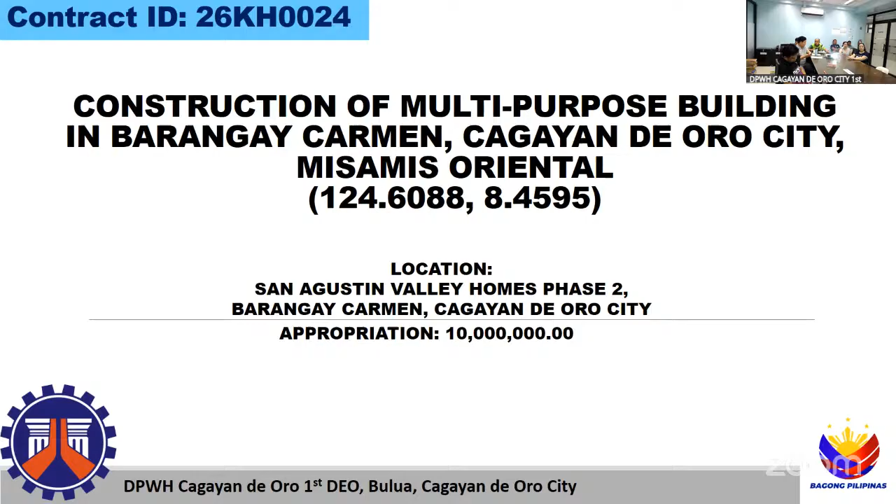Good afternoon, everyone. I'm Dina Ann Bernaldez. I'm going to present the project: construction of multi-purpose building in Barangay Carmen, Cagayan de Oro City, Misamis Oriental, with coordinates 124.6088, 8.4595, and project ID 26KH0024, located in San Agustin Valley Homes, Phase 2, Barangay Carmen. The approved budget of contract for this project is 9,899,563 pesos and 69 centavos, with a contract duration of 180 calendar days.

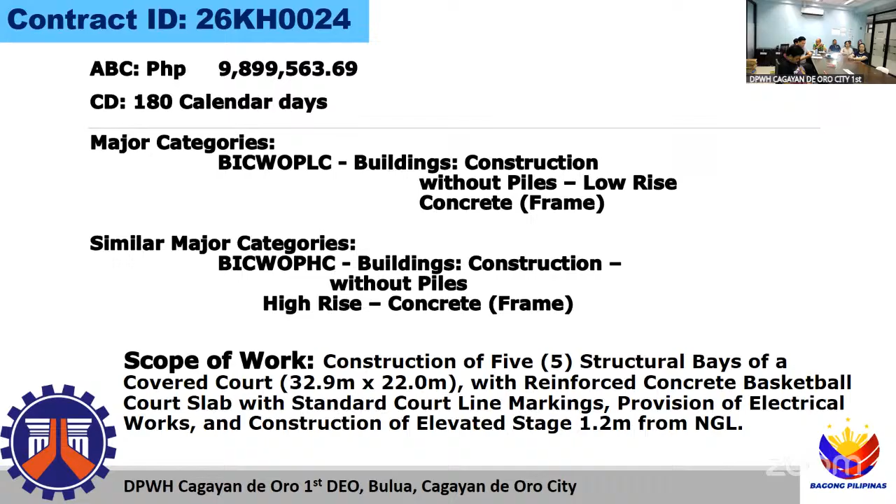The scope of work for this project includes construction of 5 structural bays of covered court with a dimension of 32.9 meters by 22 meters, reinforced concrete basketball slab with standard court line markings, provision of electrical works, and construction of an elevated stage at 1.2 meters elevation.

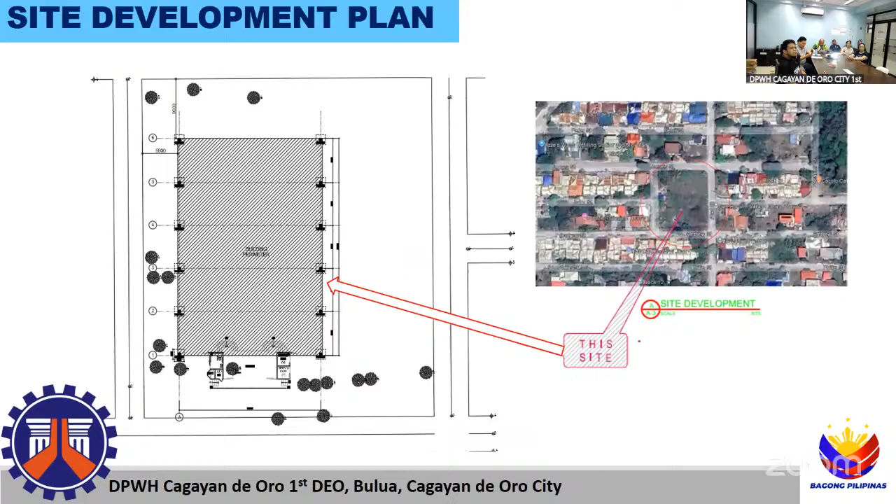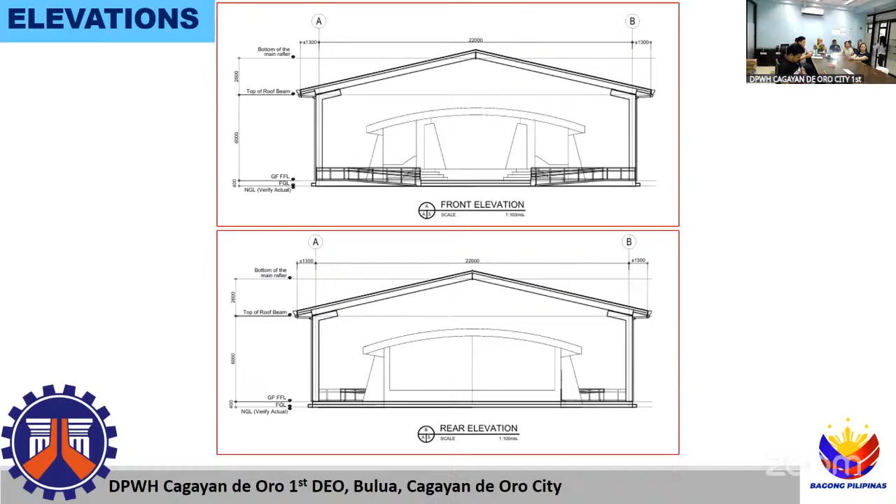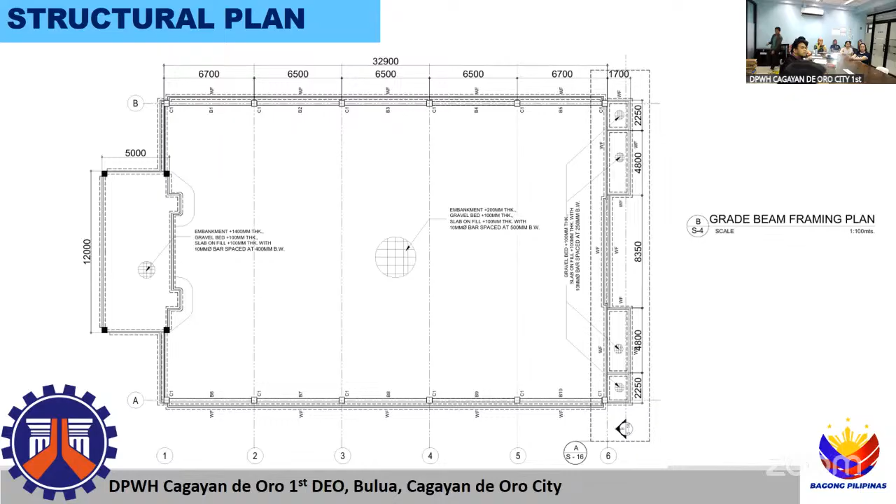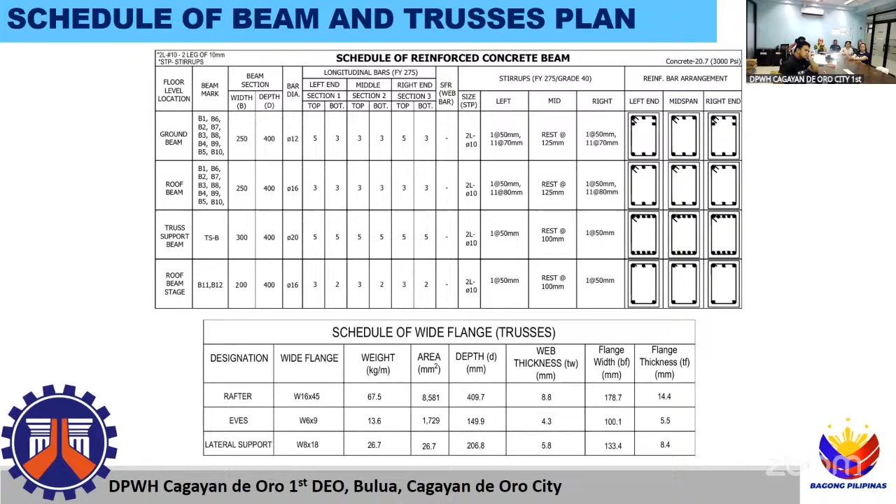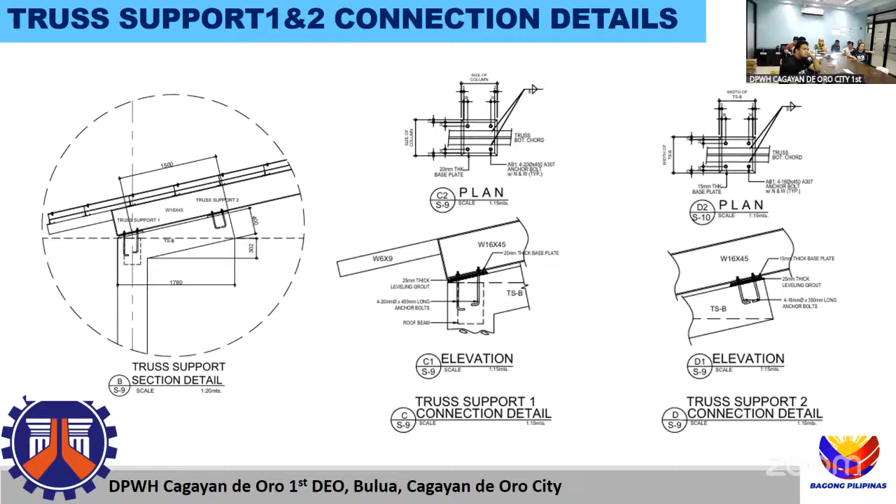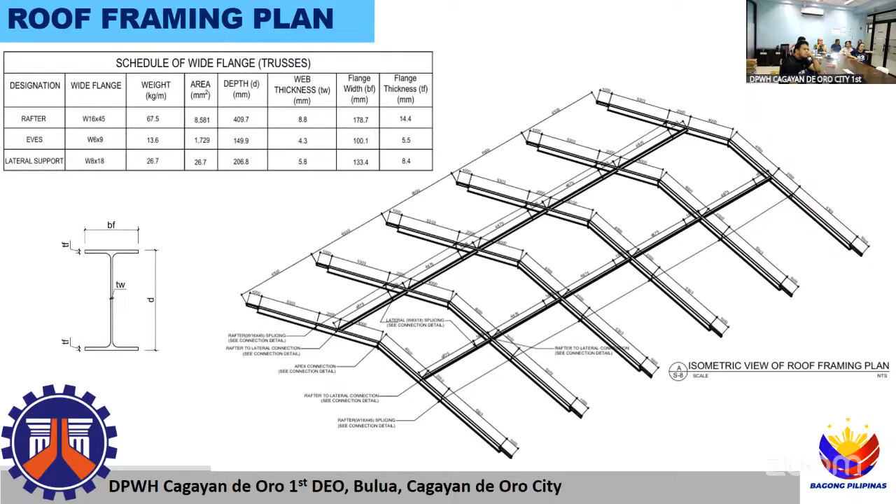Truss support details for the roof framing plan. For the rafter, we will be using the wide flange of 16 by 45. For the eaves, will be 6 by 9. And for the lateral support, which is 8 by 18.

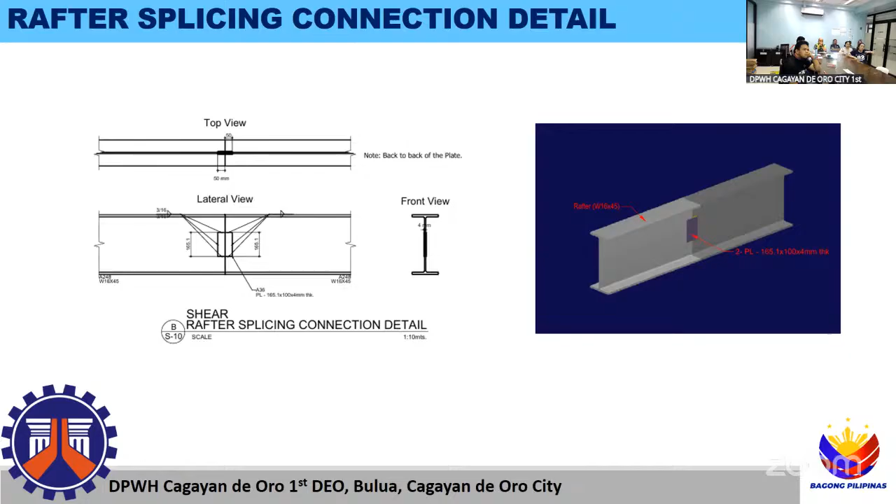Here is the apex connection detail for the rafter, as well as its rafter splicing connection and the shear splicing connection detail. And also for the connection to the lateral and the rafter.

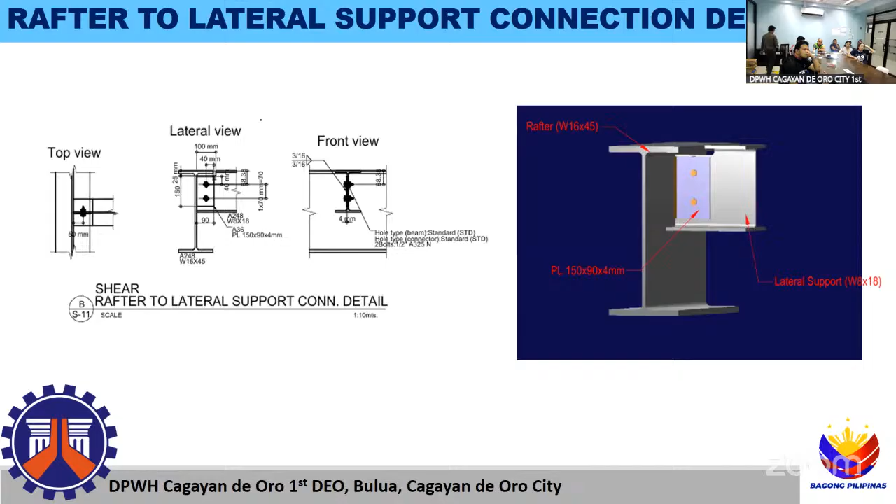Also the shear connection for the rafter and lateral support. The lateral support connection, shear lateral support connection support splicing connection detail. And for the eaves connection to the rafter.

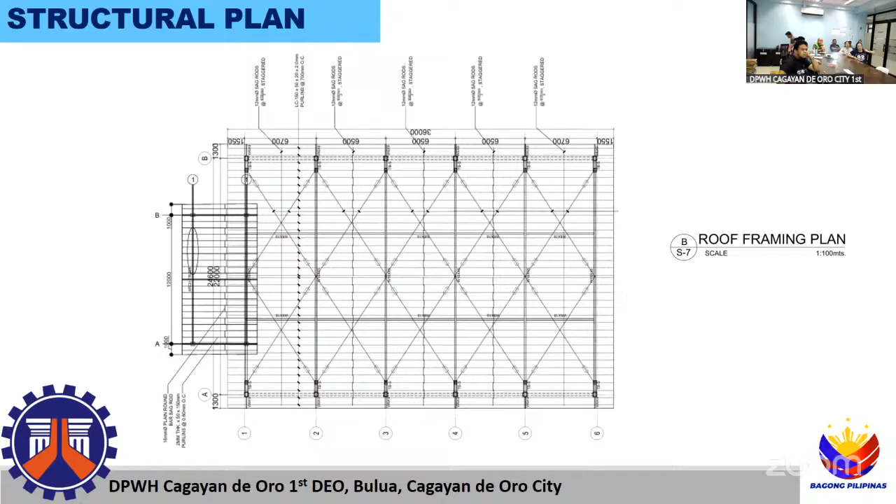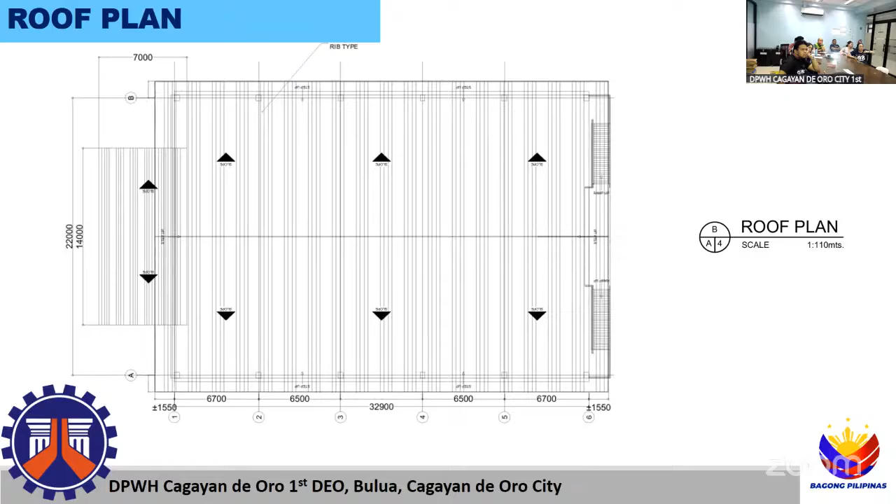So for the roof framing plan, which will include the cross bracing connections and the sagrods detail. So for the roof plan, which will be used of pre-painted rib type for both the stage and the covered court. This project also includes the provision of the ramp for PWDs and the plumbing details. For the summary of quantities.

For the footing, column and beams, we'll be using a structural concrete class A, and for the slab will be structural concrete class B. So here are the...

Also, we will be providing some safety warnings on site.

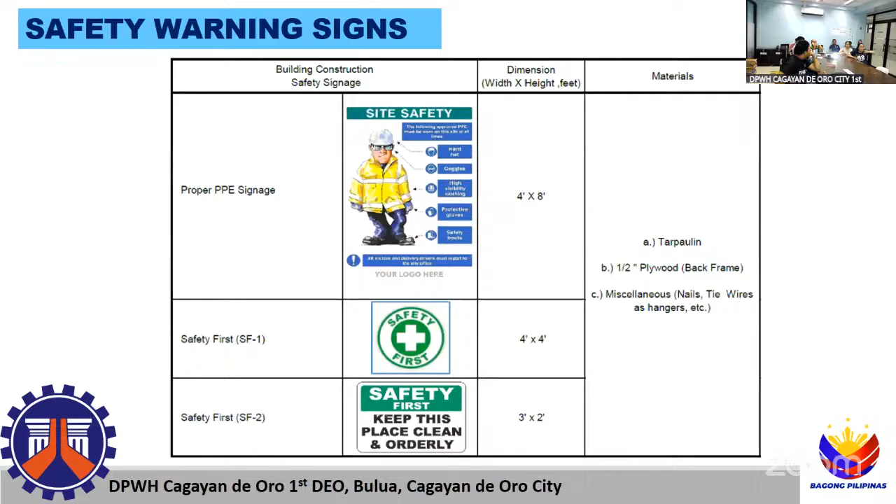For item 1001, for B31, permits and clearances, 1 lump sum. B51, project billboard signages, 2. B.71, occupational safety and health, 1 lump sum. B.91, mobilization, demobilization, 1 lump sum.

For earthworks, 803-1A, structural excavation common soil with a quantity of 255.57 cubic. Embankment from roadway excavation, item 8041A, with a quantity of 548.99 cubic. For item 8042A, embankment from borrow common soil, quantity of 293.42 cubic. For gravel fill, item 8047, quantity of 99.7 cubic.

For reinforced concrete, item 900-1C, structural concrete 3000 psi class A, 28 days, 63.16 cubic. Item 900-2C, structural concrete class B, 28 days, quantity of 83.16 cubic. For item reinforced concrete deformed bars, grade 40, item 902-1A1, 12,581.87 kilograms. For item 9032, formworks and false work, 364.92 square meter.

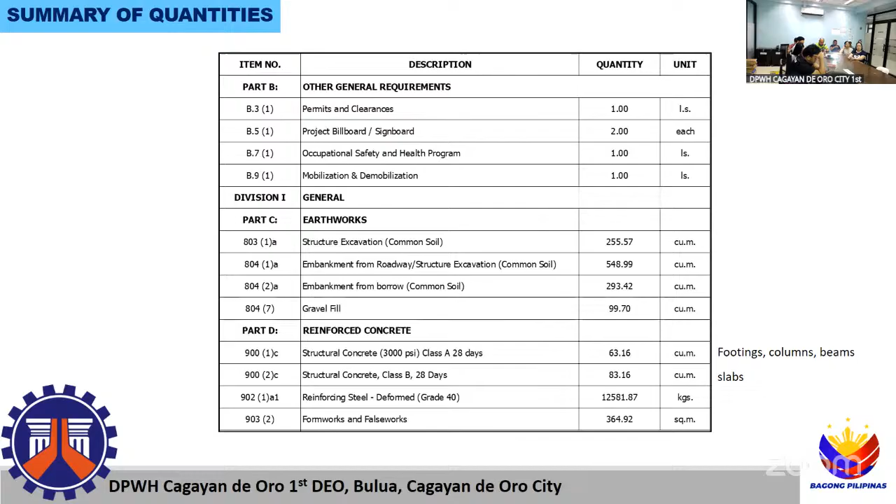For finishes and other civil works, item 1001, soil poisoning, 82 liters. 1001-9, storm drain and downspout, 1 lump sum. For item 1003-1A, 1, ceiling, metal fiber cement board, 102.60 square meter. For item 1008-1C, aluminum glass window awning type for the stage, quantity of 1.08 square meter.

For flush door, item 1010-2A, quantity 1.44 square meter. For item 1013-2A, fabricated metal roof accessories, ribs and hip rolls, 43.92 linear meter. For item 1013-2B, fabricated metal roofing accessories flashing, 202.52 linear meter. For item 1013C, fabricated metal roofing accessories for gutters, 20 linear meter.

For item 1014-1A2, pre-painted metal sheet, corrugated, with a quantity of 1,118 square meter. For item 1027-1, cement plaster finish, 334.46 square meters.

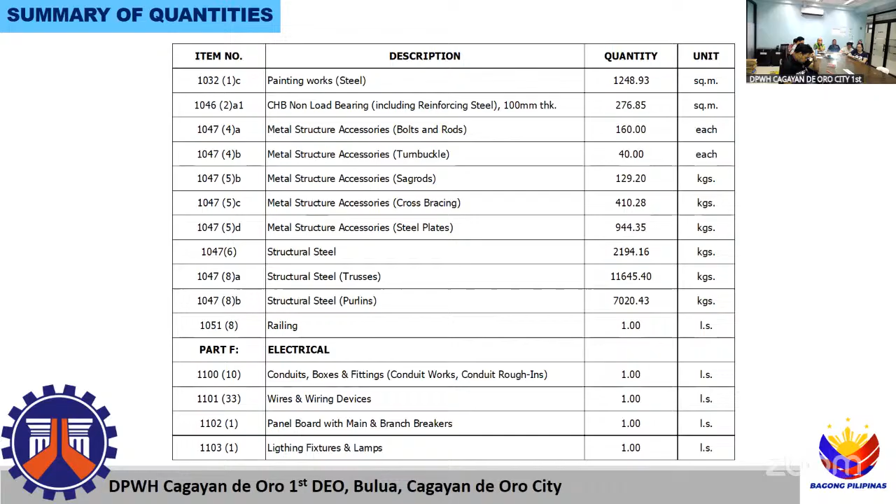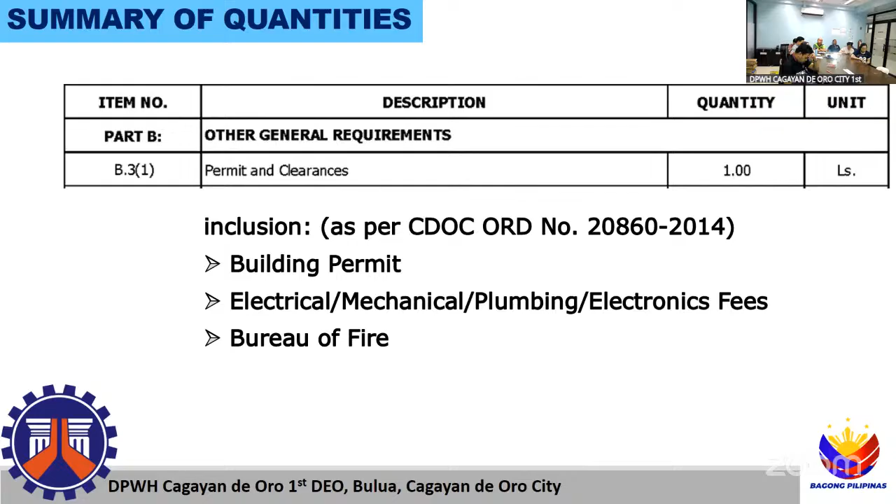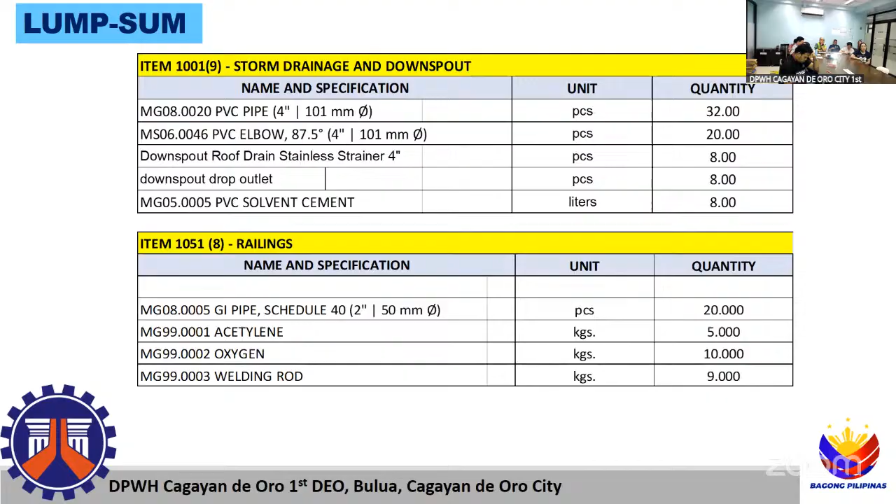For the safety warnings and signages, so the project also includes the permits and clearances. And for the lump sum, these are the items: wirings and panel boards and lighting fixtures, conduits, also storm drain and railings.

So for the minimum requirement: cargo trucks at 12, concrete vibrator, 1 ampere, 5. Backhoe, 0.80 cubic meter, dump truck, 12 cubic yard.

Again, sa cargo, 12 yard, 1 owned. Sa concrete vibrator, 5 ampere, 2 units owned. Backhoe, 0.80 cubic meter, 1 leased. Dump truck, 12 cubic yard, 1 unit owned.

So 1 bagger mixer, 4 to 6 feet cubic minute, 2 unit owned. Bar cutter, 25 mm rebar, 1 unit owned. Bar bender, 25 mm max rebar, 1 unit owned. Welding machine, 50 ampere, 1 unit owned, 500, 1 unit owned. Cutting outfit, 14 inches cut-off machine, 1 unit owned.

Material testing apparatus, 1 set owned. Minor tools, 1 set owned. Truck mounted crane, 31 to 35, 1 unit leased. So to plate compactor, 5 HP, 1 unit owned. So that's all.

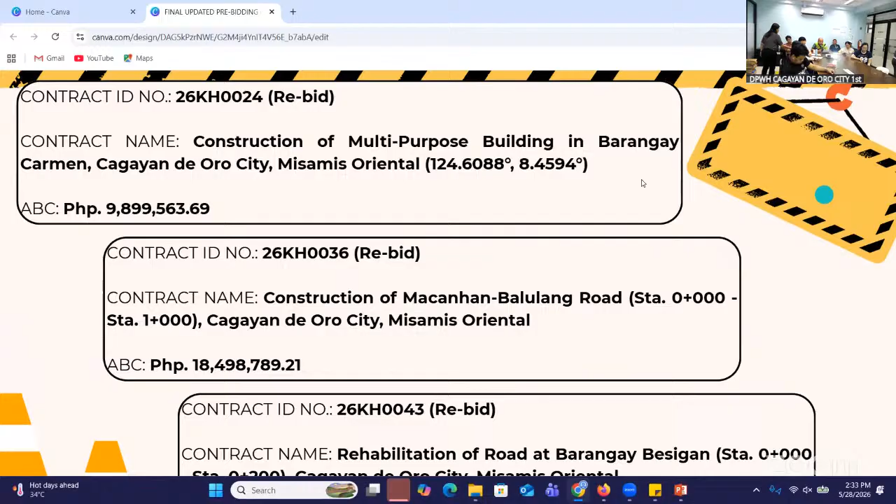Construction of Macanhan-Balulang Road, Station 0+000 to Station 1+000, Cagayan de Oro City, Misamis Oriental, with an approved budget for the contract of 18,498,789 pesos and 21 centavos. The details of this project will be discussed by Engineer Carmen.

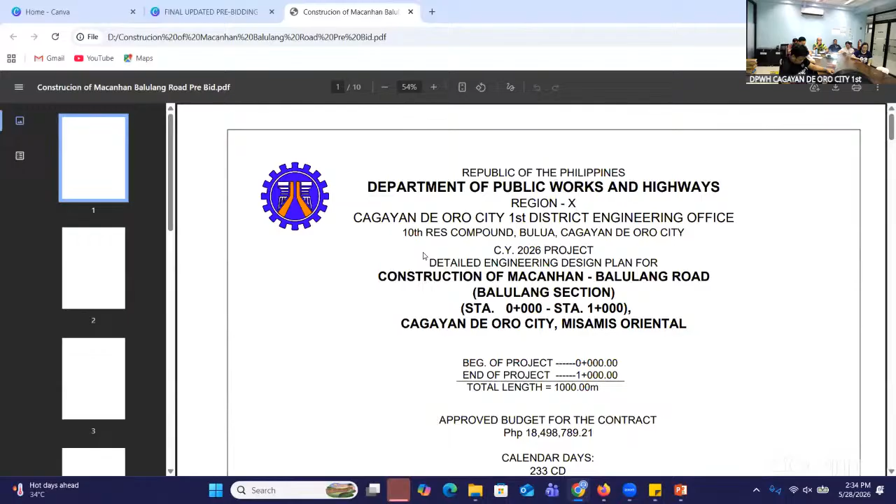Hello, good afternoon. For construction of Macanhan-Balulang Road, Balulang... shucks, my bad, let me check the title. Sorry, we need to change the title, there is no Balulang section, it shouldn't be in the title. We'll change it for the bid bulletin again.

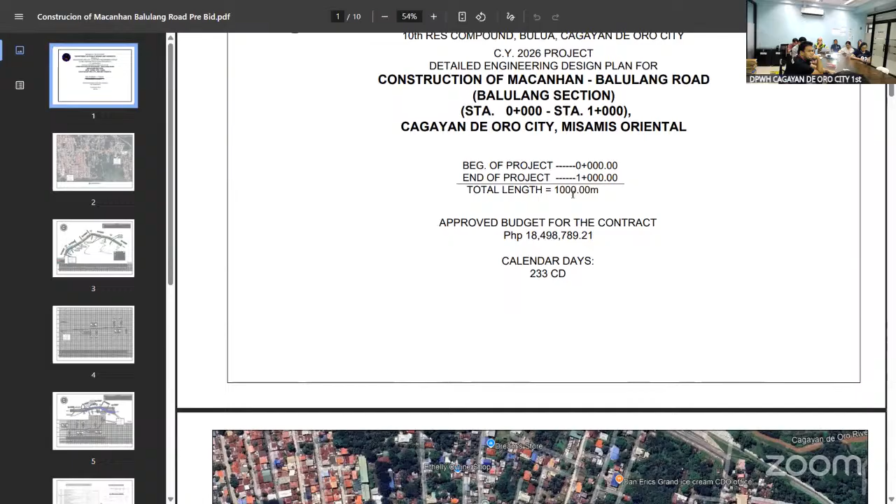Station 0 to Station 1000, Cagayan de Oro City. Beginning of project 0+000 to end of project 1+000. Total length of road is 1,000 meters. Approved budget for the contract is 18,498,789.21, with 233 calendar days. Here's the location of the project, starting from the intersection or crossing to Centro Balulang and toward Uptown, City Uptown.

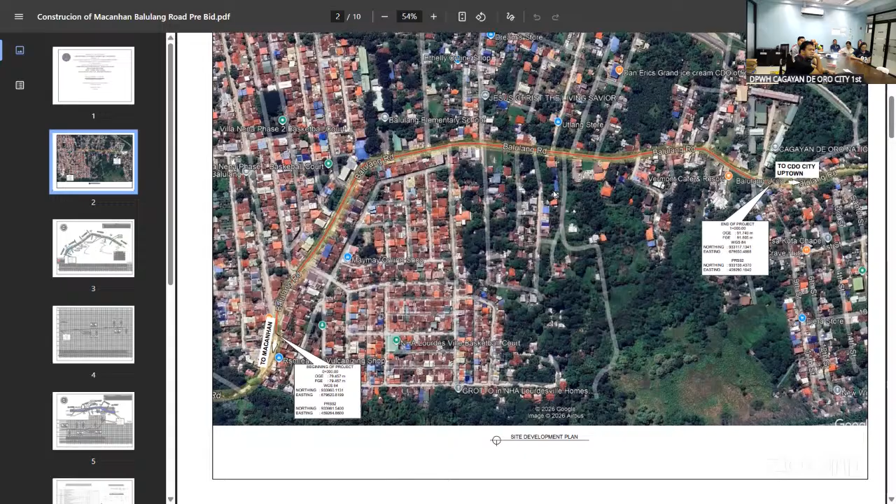So most of the scope for this project is rehabilitation of road only. Here's the plan and profile for the project. As I've stated, the stationing of the project started at the intersection, toward Centro Balulang or toward Barangay Balulang.

Okay, proceeding next, the plan and profile. And here are the summary of quantities for this project.

B.3 permits and clearances, 1 lump sum for the excavation permit. B.5 project billboards, the signboard for each. B.7.2 occupational safety and health program, 1 lump sum. B.8.2 traffic management, 1 lump sum. B.9 mobilization, 1 lump sum.

For our earthworks we have 1013B3 removal of actual structures and obstruction, 0.23 meter thick PCCP unreinforced, with a quantity of 4,213.79 square meters. For 1022, surplus common excavation with a quantity of 211.08 cubic meters. 1041A for embankment from roadway structure excavation, common soil, with a quantity of 47.13 cubic meters. And 1051B for subgrade preparation for existing pavement with a quantity of 6,100 square meters. For the aggregate base course, item 211, we have a quantity of 1,220 cubic meters.

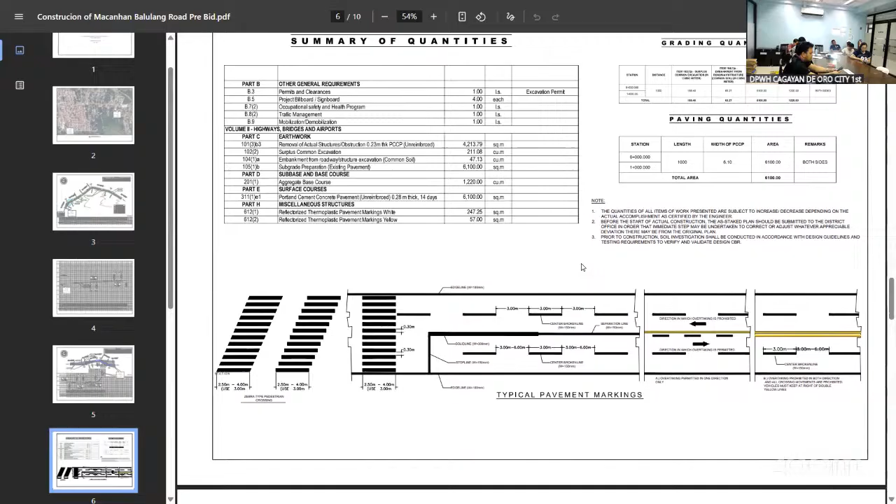Here are the typical pavement markings, details, grading quantities, and so forth. And here are the typical roadway sections for this project. We have a 280mm thickness for our PCCP.

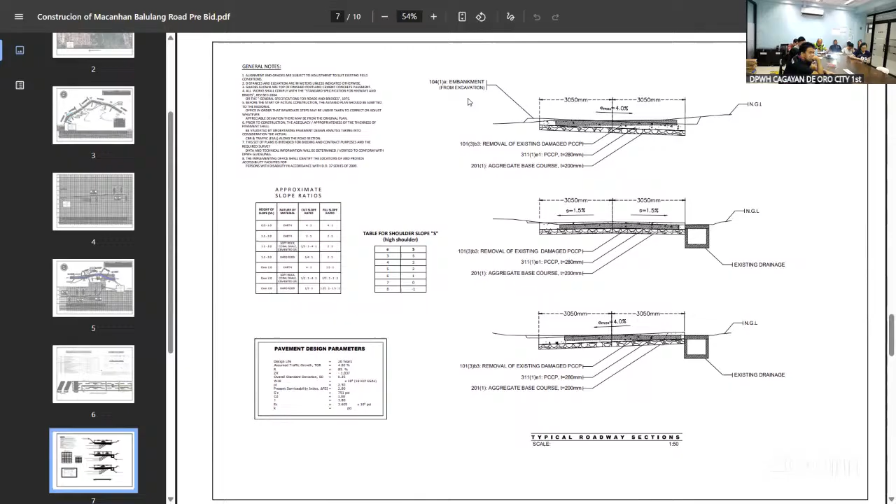That's going to be replacing our 0.23 meters thick actual or existing pavement. For the aggregate base course, we're going to be replacing it with 200mm thickness for base course. So here are the typical roadway sections, and here's the typical plan for reblocking the old pavement, with the details for that.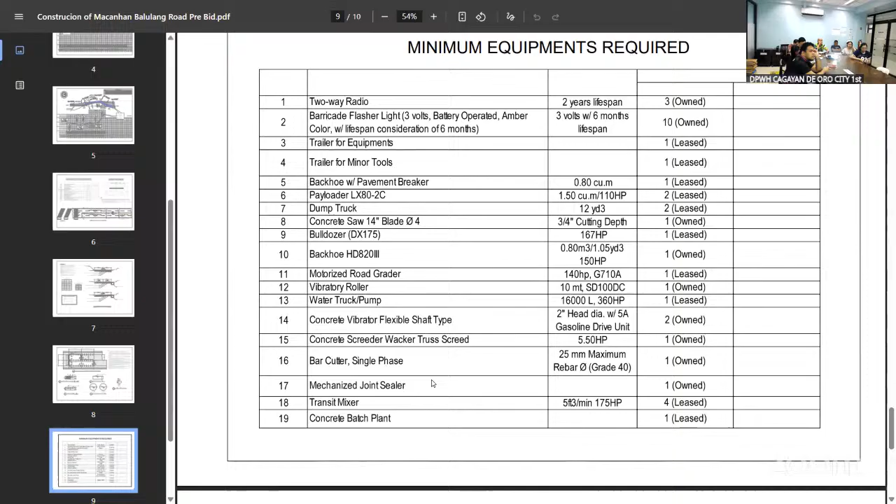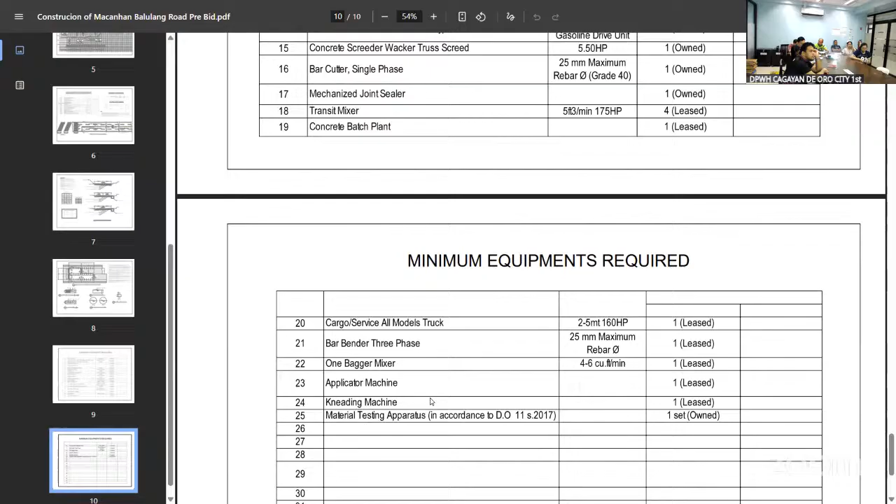Cargo/service truck, all models truck, 1 lease; bar bender, 1 lease; bagger mixer, one lease — should be one own, we'll change it for the bid bulletin, sorry. Applicator machine and kneading machine should be one own still. And lastly, material testing apparatus in accordance with DO 11 series of 2017, one set, own.

So that's all for construction of Macanhan-Balulang Road, Cagayan de Oro City, Mr. Sorrento. Any questions?

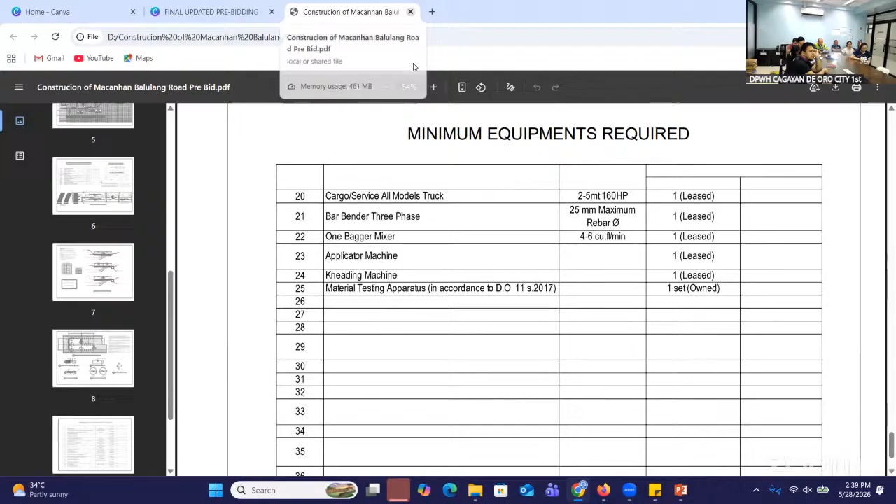Rehabilitation of road at Barangay Besigan, Station 0+000 to Station 0+200, Cagayan de Oro City, Misamis Oriental. The details of this project will be discussed by Engineer Aris Calisan.

Good afternoon, everyone. Rehabilitation of road at Barangay Besigan, Station 0 to Station 200, Cagayan de Oro City, Misamis Oriental. That's a 200-meter length. The approved budget for the contract is 4,622,247.02. Project duration is 74 calendar days.

The scope of work is construction improvement of existing road to gravel or paved road, with width of 2.5 meters both sides and 0.2 meters thick PCCP. There's also construction of gravel shoulder with width of 0.7 meters both sides and construction of RC pipe culvert with slope protection. Material used is grouted riprap and stone masonry.

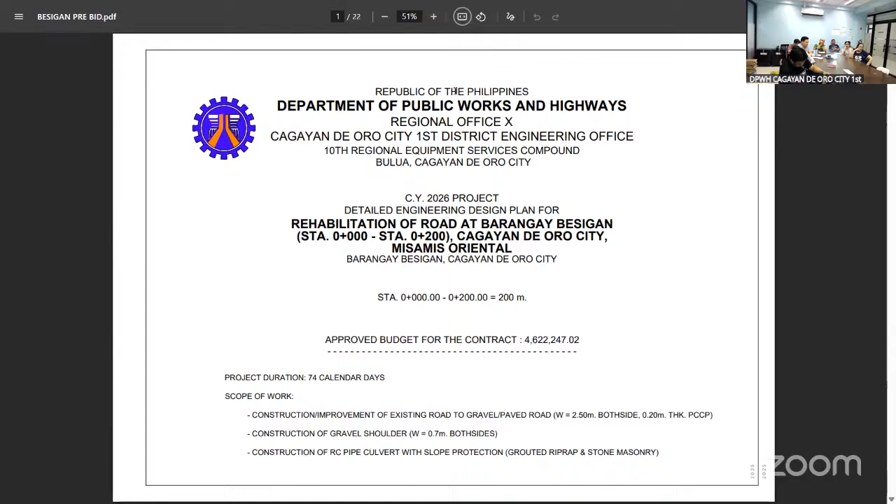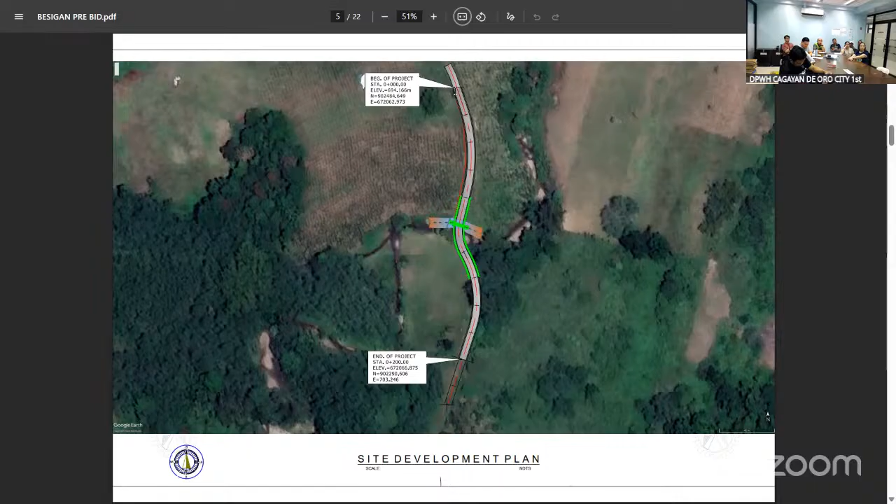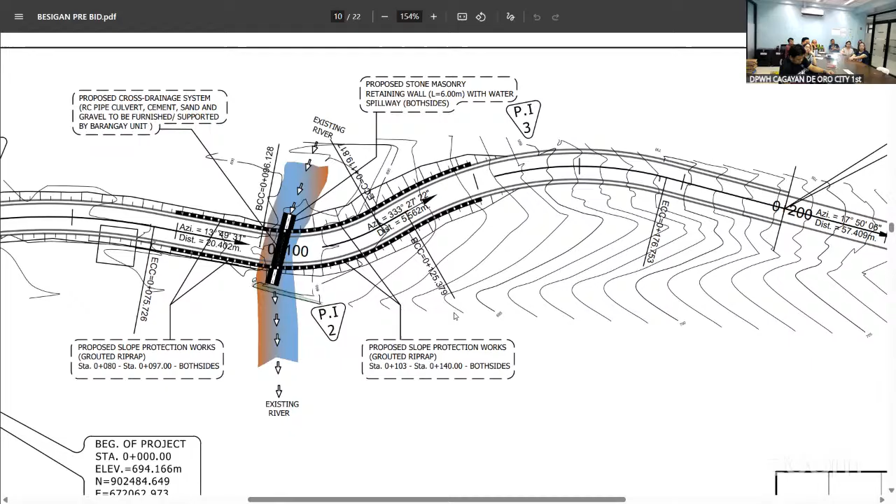For the plan and profile, this indicates every scope of work, wherein we could see the existing waterway that we will be passing through. We will be installing a cross drainage system. Material used is RC pipe culvert, and slope protection with the use of retaining wall stone masonry on the RC pipe and grouted riprap for the continuation of the slope protections. You can also see here the invert elevation of the RC pipe, as shown on the plan and profile of the approved plan.

Continuation. This is also the straight line diagram. The whole 200-meter length, we will not be having the concreting, so there should be a station limit here. If you see the brown one, we will be having a gravel aggregate course, and the gray one is the only station of the PCCP. So it is the budgeting of the appropriation.

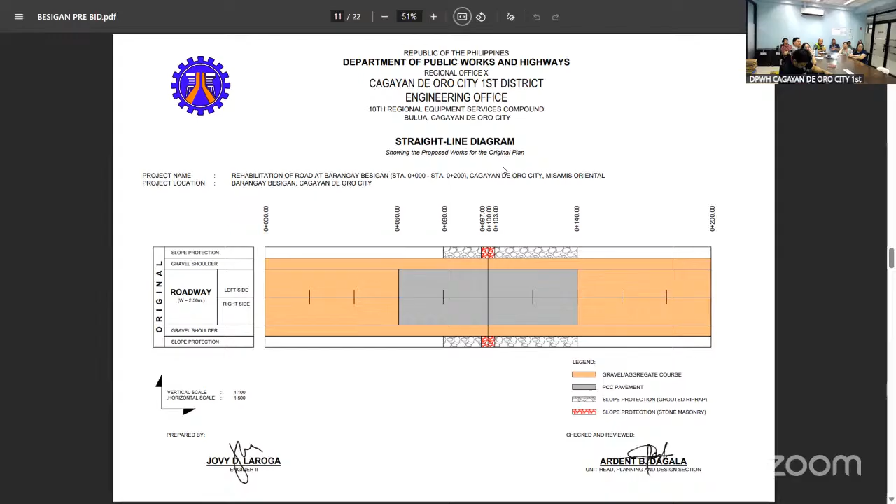For the typical sections, again, we will be having a section of just gravel aggregate base course, and we will be having a PCCP with width of 2.5 meters both sides, so 5 meters both. Also in the PCCP section, we will be having the slope protection and also the typical section of the waterway in the RC pipe culvert.

For the station limit, for the PCCP, the length of the PCCP is just 80 meters. And for the others, it is 120 meters, the other gravel carriageway. There's also the stationing of these slope protections, as you can see here.

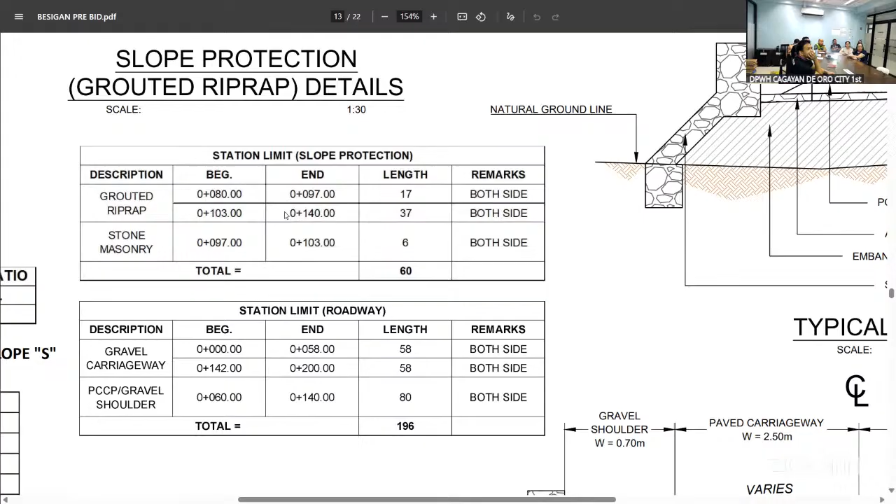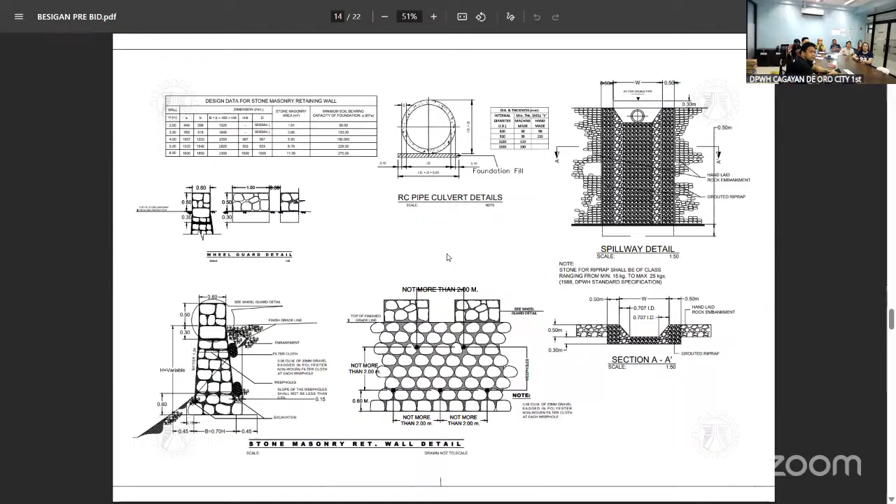These are the details of these slope protections and the pipe culvert, and also there's construction of spillways after the cross drain, both outflow and inflow. These are the details of the PCCP and the geometric design standard drawings.

For summary of quantities, we have here B.3 permits and clearances, 1 lump sum. B.5 project billboard and signboard, each. Occupational safety and health program, 1 lump sum. Traffic management, 1 lump sum. Mobilization, demobilization, 1 lump sum.

Embankment from roadway, structure excavation, common soil, 219.05 cubic meters. Embankment from borrow, common soil, 938.76 cubic meters. Aggregate base course, 139.03 cubic meters. Portland cement concrete pavement, unreinforced, 0.2 meters, take 14 days, 400 square meters. Pipe culverts, class 4 RCPC, 18 linear meters. Grouted riprap, class A, 187.62 cubic meters. And stone masonry is 69.79 cubic meters.

For the minimum equipment requirement, we have here backhoe, 1 leased; payloader, 1 leased; motorized road grader, 1 leased; vibratory roller, 1 leased; water truck pump, 1 owned; plate compactor, 1 owned; transit mixer, 4 leased; concrete vibrator, 2 owned; concrete batch plant, 1 leased; concrete screeder, 1 owned; concrete saw, 1 owned; bar cutter single phase, 1 owned; joint sealer machine, 1 leased; 1 bagger mixer, 1 owned; backhoe wheel mounted, 1 leased; material testing apparatus, 1 owned; two-way radio, 2 owned; and barricade flasher light, 12 owned.

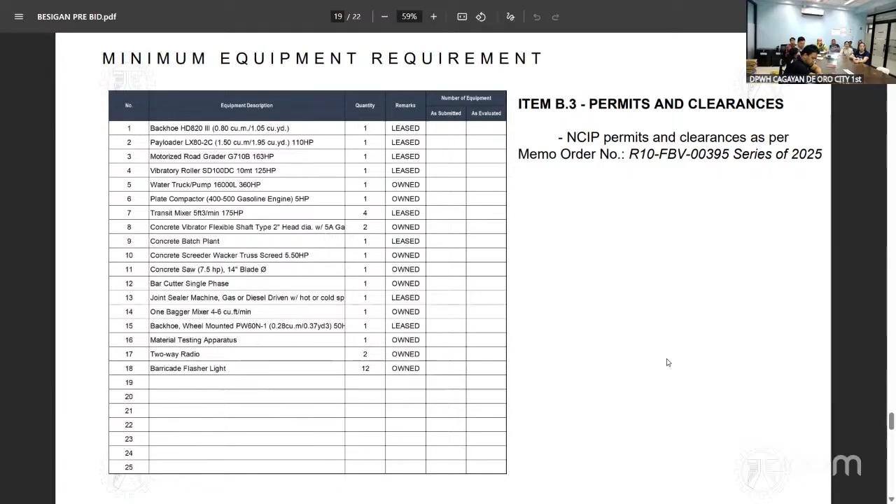For the inclusion of the pay item B.3 permits and clearances, the inclusion of this pay item is NCIP permits and clearances as per memo order number R10-FBV-00395 series of 2025. The rest of these are the attachments: for our road right of way, our permit to enter, site validation plan, site validation documents, and also our soil test reports. We have trial 1 and trial 2.

So that's all for this project. Any question?

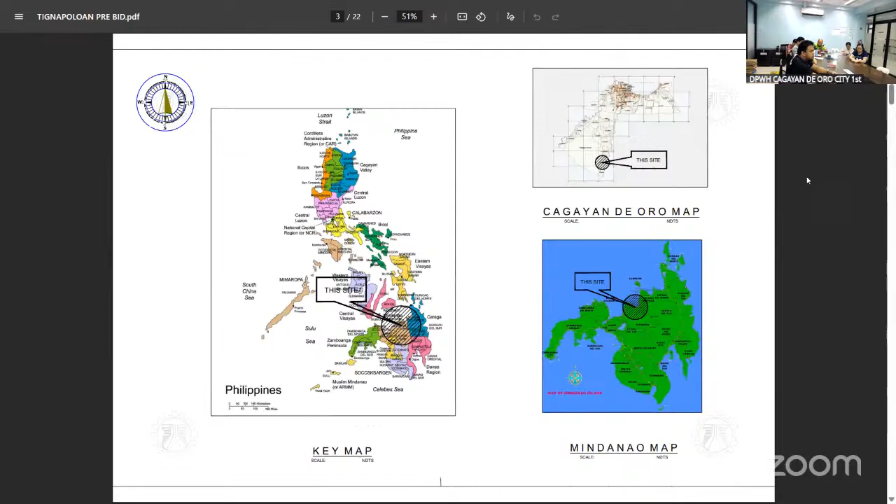The general drawing is located in Barangay Tignapoloan. This is the vicinity map. This is the site development plan. It's in front of Manay High School.

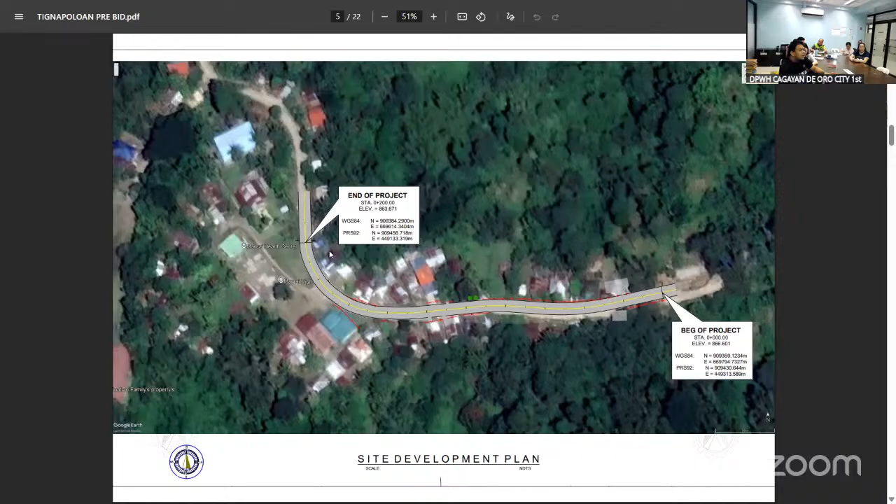So this is the Macanhan-Balulang School. We will be having a rehabilitation of road, 200 meters length, in this section.

So these are the site images. For our plan profile, this is the plan and profile indicating our scope of work and the locations of our streetlights.

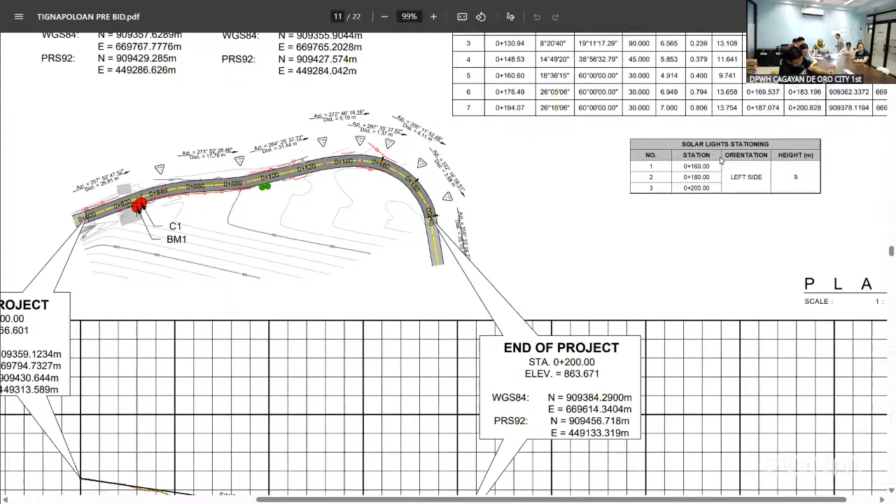So this is also the straight line diagram wherein you can see the brown one representing the rehabilitation of roadway, and the red one is the installation of solar streetlights.

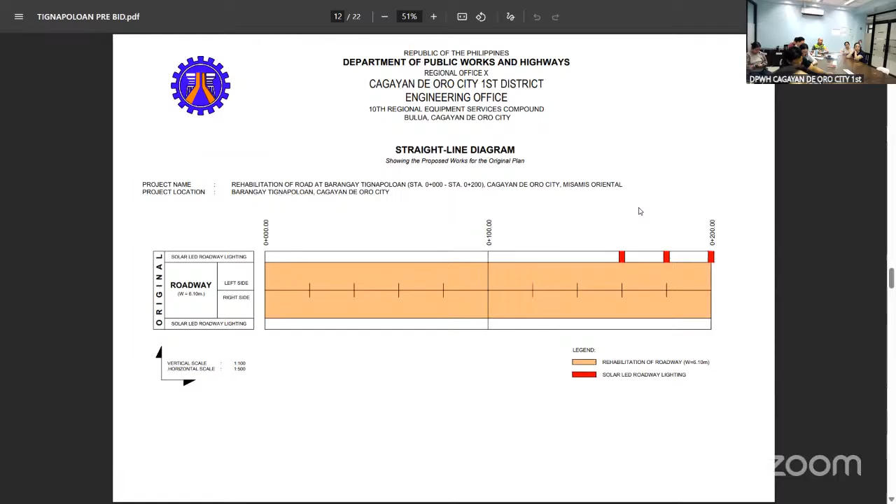Wow. So for typical drawing, this is our typical drawing. We will be having a width of 3.05 meters both sides, so 6.1 overall.

So inclusion of this project is there is a reflectorized thermoplastic pavement marking detail whole stretch of the project. And you can see here the reblocking details on the left side. So there's also an installation of solar LED roadway lightings, 9 meter height and 125 watts.

So this is the PCCP details and the geometric design standard drawings.

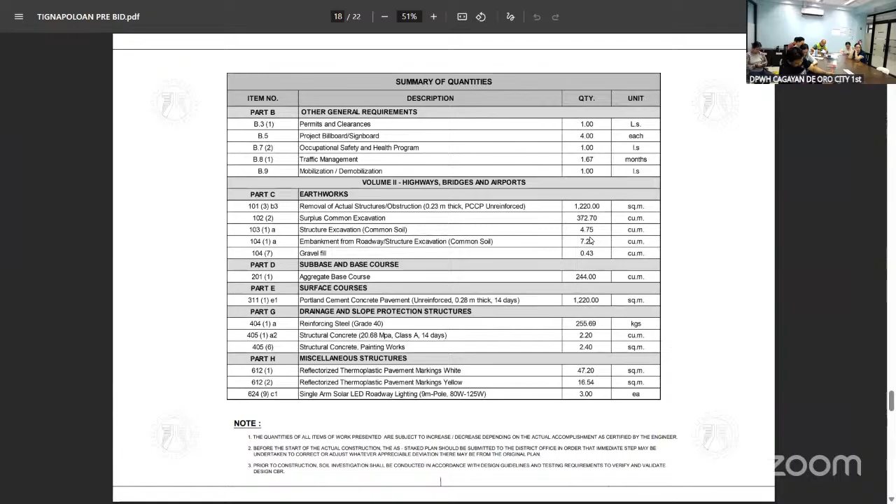So for the summary of quantities, you have here permits and clearances, 1 lump sum, project billboard and signboard 4 each. Occupational safety and health program, 1 lump sum, traffic management, 1.67 months.

Mobilization, demobilization, 1 lump sum. Removal of actual structure, obstruction, 0.23 meters thick,

1,220 square meters surplus common excavation, 372.7 cubic. Structure excavation, 4.75 cubic, embankment from roadway structure excavation, 7.26 cubic, and gravel fill, 0.43 cubic.

For the sub-base and base course, we have here aggregate base course, 244 cubic. Portland cement concrete pavement, 1,220 square meter.

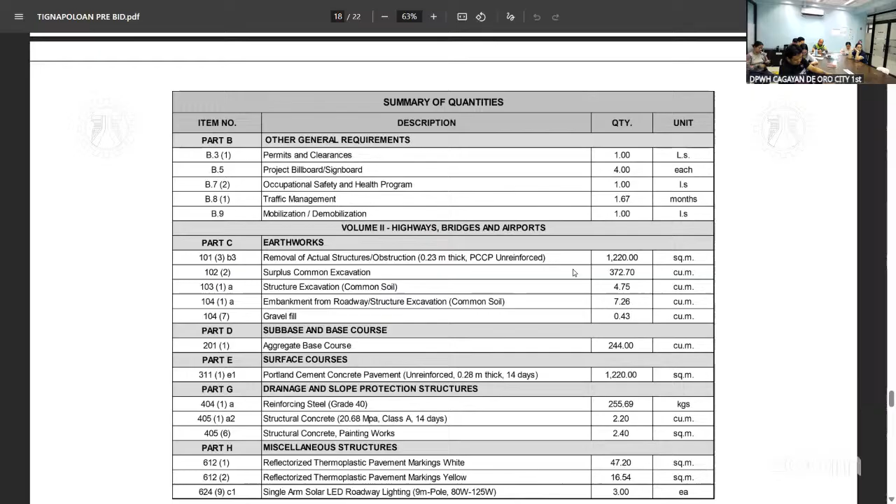For the reinforcing steel, grade 40, 255.69 kilograms. Structural concrete, 2.2 cubic. Structural concrete painting works, 2.4 square meter.

And reflectorized thermoplastic pavement markings white, 47.2 square meter. Reflectorized thermoplastic pavement markings yellow, 16.54 square meter. And single arm solar LED roadway lighting, 9 meters pole, 80 to 125 watts, 3 each.

So for our minimum equipment requirement, we have here backhoe. This, I'll be posting the owned or leased in the bid bulletin. So this is backhoe, one list, dump truck, 2 list, bulldozer, 1 list, payloader, 1 list, motorized road grader, 1 list, vibratory roller, 1 list, water truck pump, 1 list, plate

compactor, 1 list, transit mixer, 4 list, concrete vibrator, 2 owned, concrete batch plant, 1 list, concrete screeder, 1 list, concrete saw, 1 list, 1 owned, bar cutter, single phase, 1 owned, joint sealer machine, 1 list, bar bender, 1 owned, 1 bagger mixer, 1 owned, truck mounted crane, 1 list, cargo service truck, 2 to 5 metric ton, 1

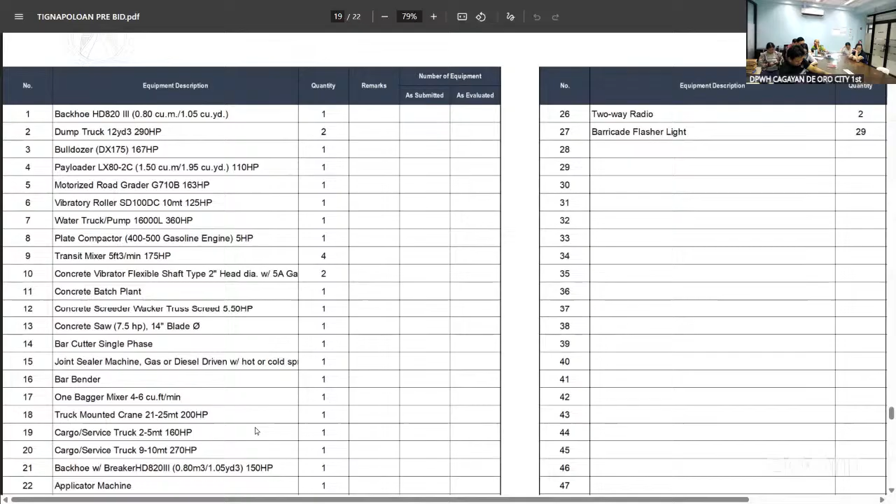list, cargo service truck, 9 to 10 metric ton, 1 list, backhoe with breaker, 1 list, applicator machine, 1 list, and kneading machine, 1 list, and material testing apparatus, 1 owned. So for our traffic management, we have here 2-way radio, 2 owned, and barricade flasher light, 29 list.

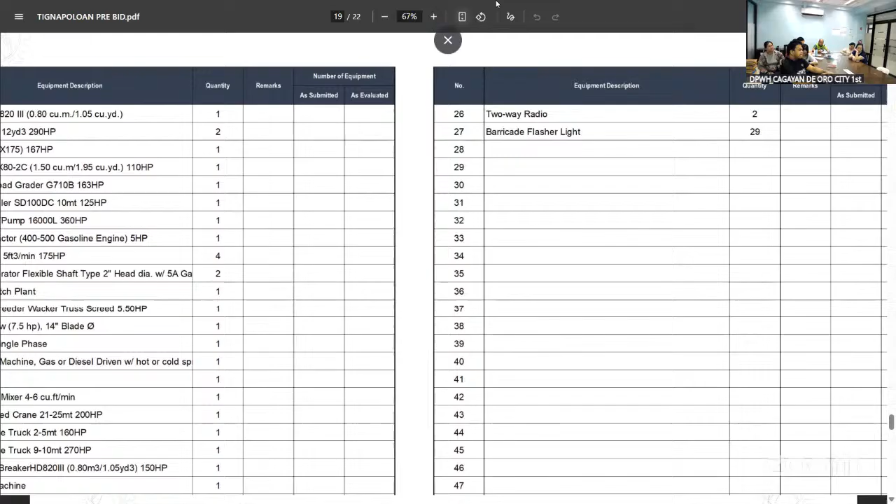So for the inclusions of our pay items, we have here permits and clearances. The inclusion of this pay item is NCIP permits and clearances as per memo order number R10 FDV 00395 series of 2025. And this is the specifications of our single arm solar LED roadway lightings.

So in continuation, this is the attachment. So this is the soil test reports, trial 1 and trial 2.

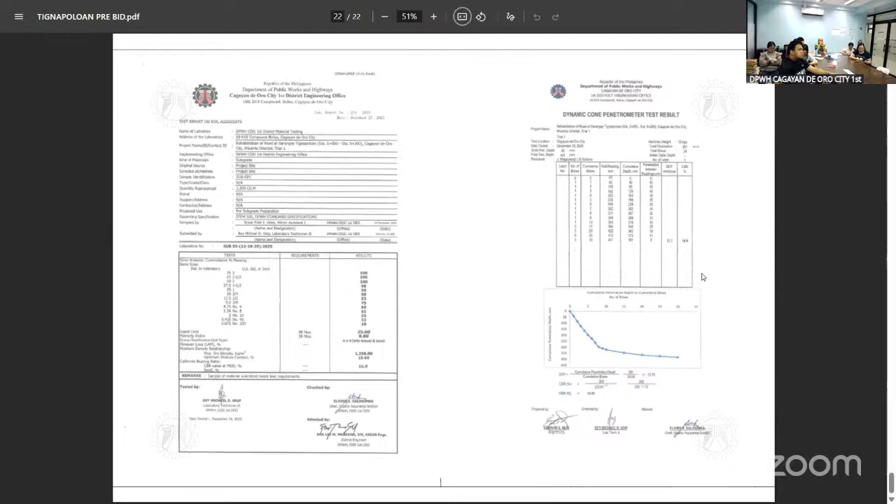So that's all for this project. Take care. Any question?

Thank you, Engineer Caliso. Do we have any question? How about from our online viewers? Here's the design. There is none.

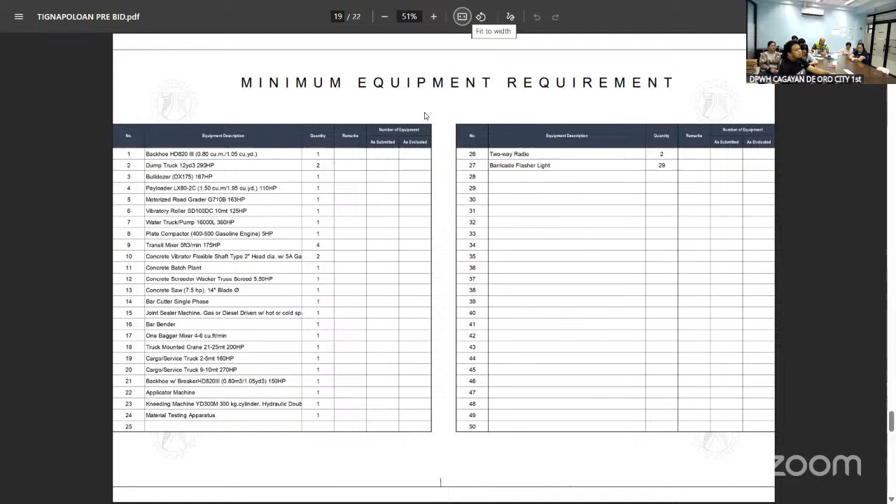There's no questions regarding the details of this matter. So now, let's proceed to,

so now we will call our BAC secretariat for discussions of the dates of the opening of bids and other matters for our prospective bidder.

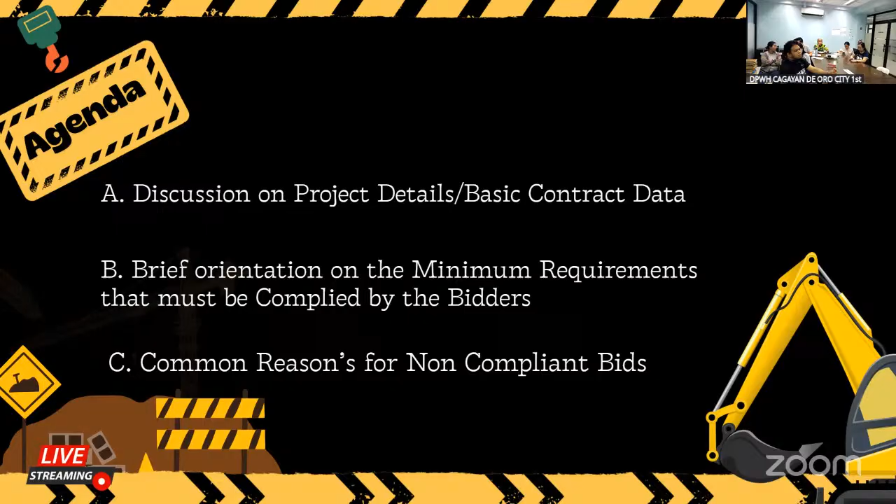So good afternoon once again. I will be discussing more on the minimum requirements that must be complied by the bidders and the common reasons for non-compliance. So first, we have here the procurement schedule.

So the aforementioned projects, these are the deadlines now. So we have here the buying of tender documents, which will be until June 9, 2026 at 9:30 a.m. only. For the deadline for each submission of bids, it will be on the same date until 10 a.m. Then it will be followed, the opening of bids will be right after the dropping or the submission of bids on the same day.

So we have here the submission of bids. We have two modes of submission: the manual submission and the electronic submission of bids. For the manual submission, we have a two envelope system. For the first envelope, we have the technical, and the second envelope is the financial envelope.

So for the technical envelope, enclosed is the original and copy 1 and copy 2 of your bids. Also for the financial envelope. So for the electronic submission of bids, the details are stated in the bid data sheet, which is in accordance with GPPB Resolution 87 series of 2020.

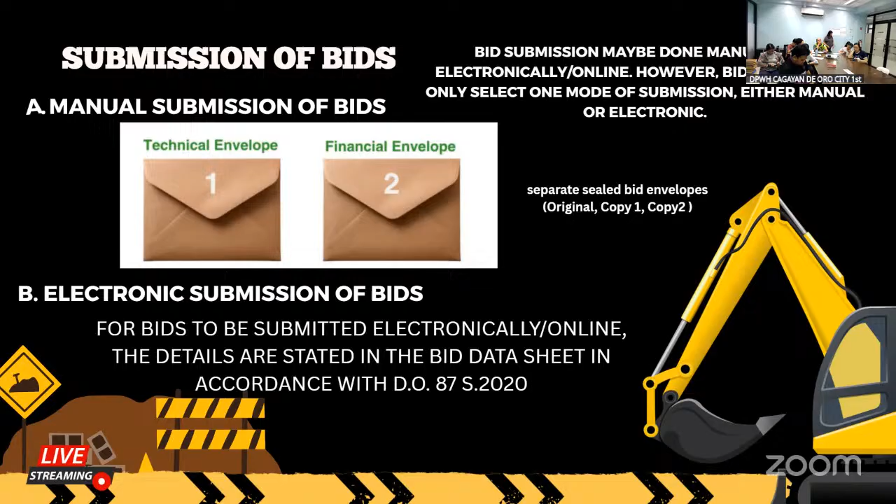So for the submission of proposals, bid proposals may be submitted through an authorized representative together with the original notarized special power of attorney or SPA for sole proprietor, for board, partnership, joint venture, resolution with secretary's certificate for the corporation, partnership, joint venture, or cooperative, which is contract specific, and a presentation of company ID or any government ID to ensure the representative is an official member and to prevent fraudulent actions such as unauthorized use of another contractor's eligibility for personal gain.

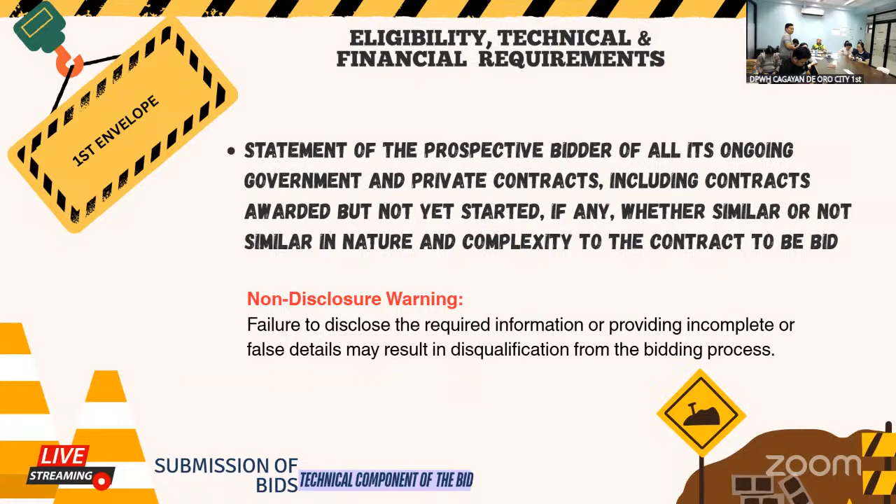The statement of the prospective bidder of all its ongoing government and private contracts, including contracts awarded but not yet started. So we have here a reminder for the prospective bidders that failure to disclose the required information or providing incomplete or false details may result in disqualification from the bidding process.

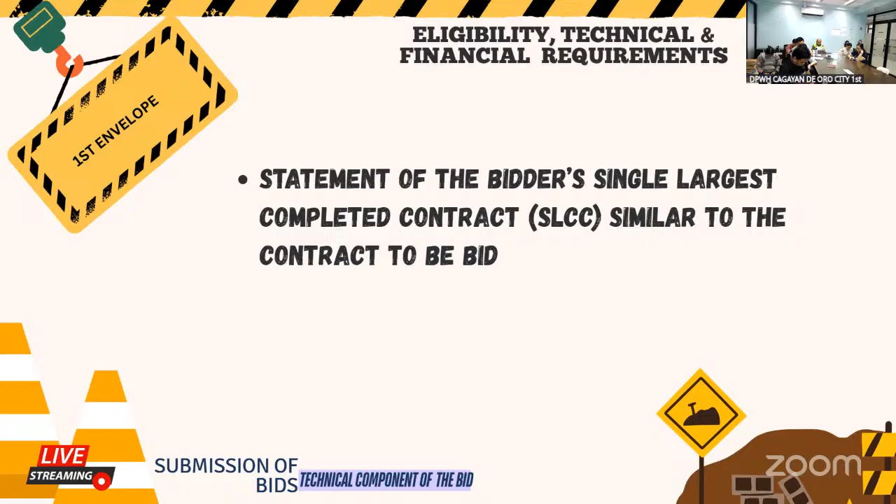So this one is the statement of the bidder's single largest completed contract, similar to the contract to be bid. So we also have here the PCAB license or special PCAB license in case of joint ventures.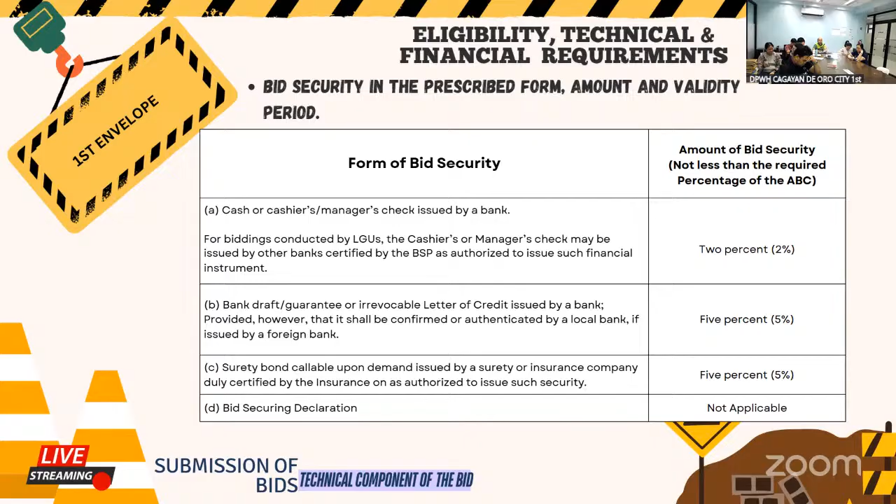And then we also have here the bid security in the prescribed form, amount, and validity period. So we have 4 forms: the cash or cashier's/manager's check, the bank draft, guarantee or irrevocable letter of credit, surety bond, and the bid securing declaration, wherein prospective bidders may opt to choose either of the 4 forms of bid security. So we have here the bid securing declaration form, standard form.

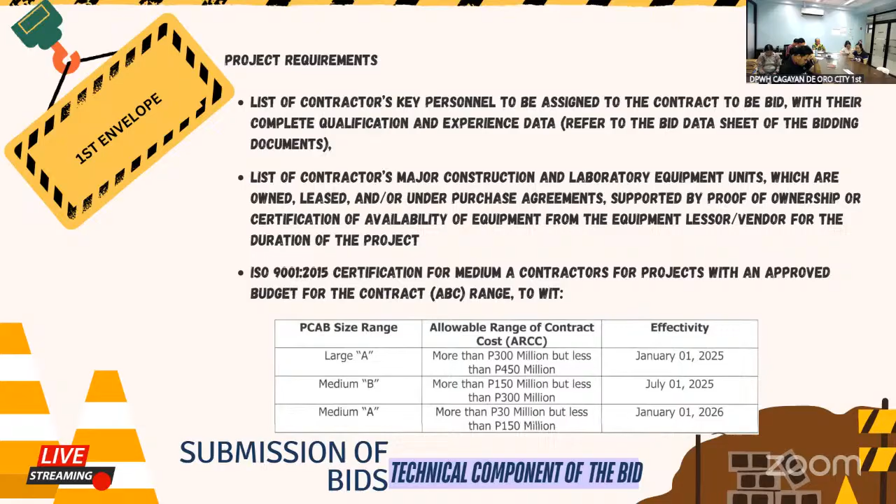So these are the standard forms for the list of contractor's key personnel. The standard form for the list of contractor's major equipment. Prospective bidders, may we remind you, please fill up the said information stated here.

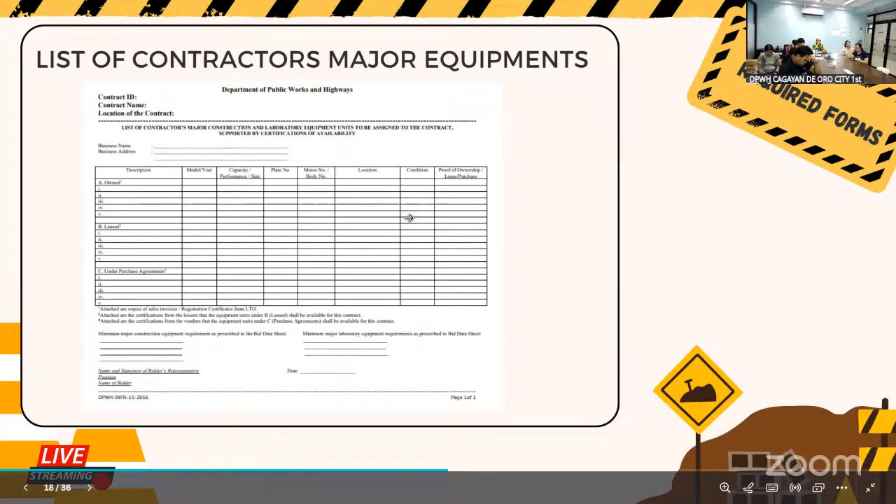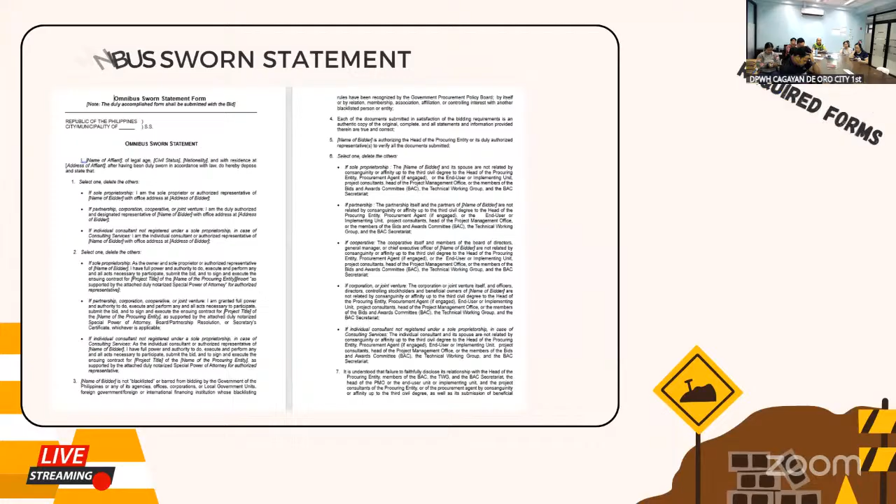Then the original duly signed omnibus sworn statement, we have a standard form for that. Then the prospective bidder's computation of net financial contracting capacity, or the NFCC. For joint ventures, they should attach their duly signed joint venture agreement. So we have here the standard form for the omnibus sworn statement.

So an additional requirement for corporations, the latest general information sheet reflecting beneficial ownership information, which is duly received by the Securities and Exchange Commission.

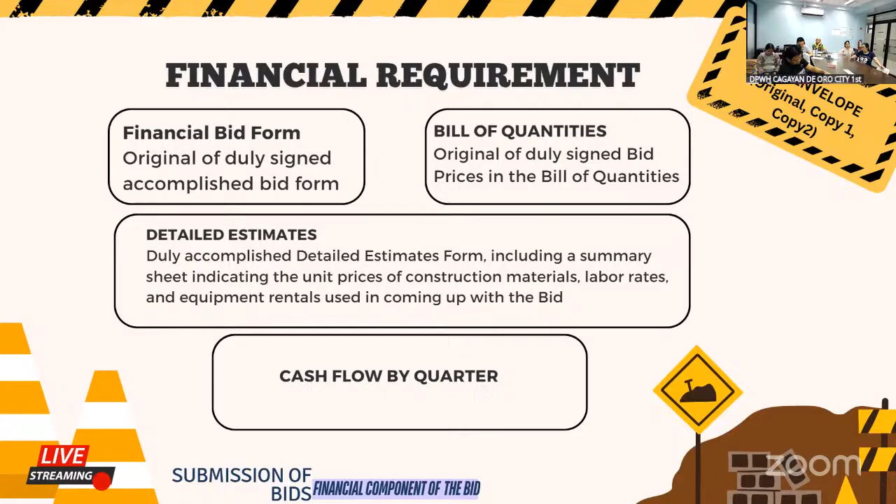So for our second envelope, we have here the financial requirements or the financial proposal. So we have 4 documents to be submitted. We have here the financial bid form, bill of quantities, the detailed estimates, and the cash flow by quarter. So we have here the following standard forms, which can all be downloaded from the website and PhilGEPS.

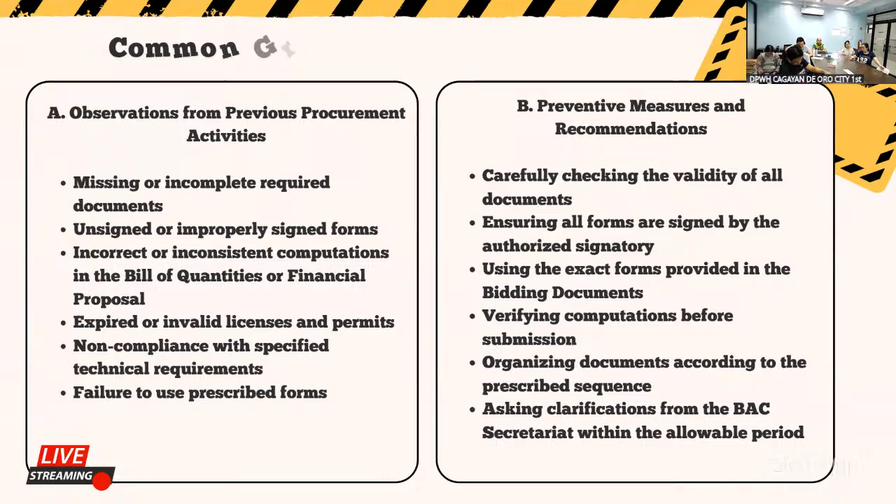So we have here the common grounds for a non-compliant bid. One of the observations among the observations from our previous procurement activities, we have here the missing or incomplete required documents, unsigned or improperly signed forms, incorrect or inconsistent computations in the bill of quantities or financial proposal, expired or invalid licenses and permits, non-compliance with specified technical requirements, and the failure to use the prescribed forms.

So what are the preventive measures or the recommendations we have? So we have here to carefully check the validity of all documents, ensure all forms are signed by the authorized signatory, use the exact forms provided in the bidding documents, verify computations before submission, organize documents according to the prescribed sequence, and ask for clarifications at the BAC secretariat within the allowable period.

So I believe that would be all, Mr. Chair. Thank you and good afternoon.

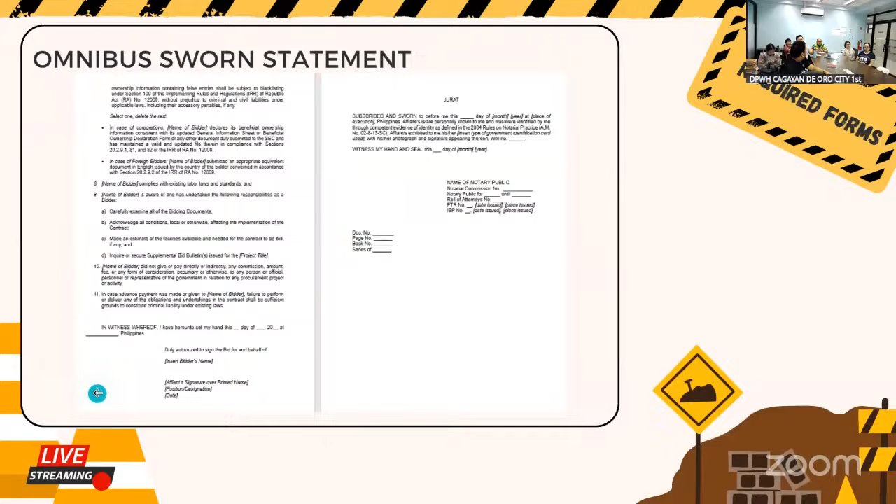Where's your question? What are the questions?